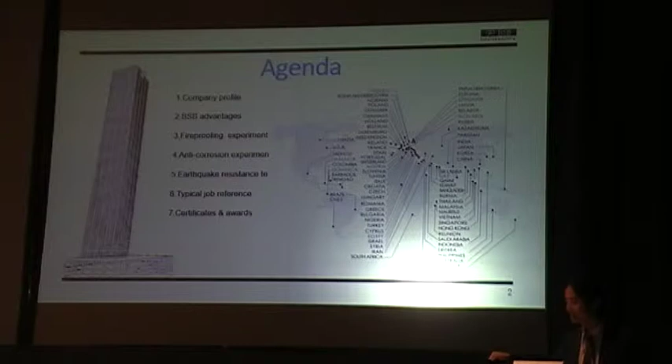These are some of the countries that we exported our air conditioning to. And this is the headquarters that we have for BSB, that we built in, I believe, 2009, as it says.

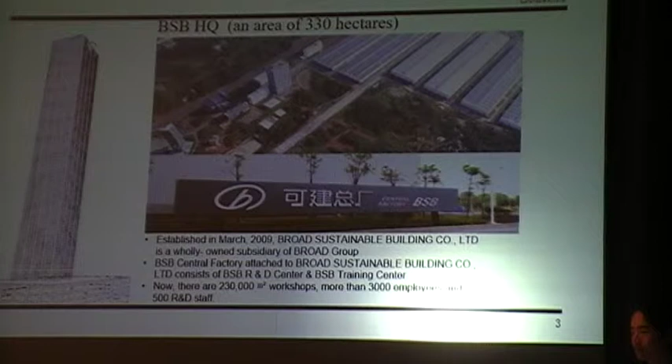And earlier, I think the building that we have seen, the 30-story building, is existing. It's a hotel. And I don't know if Mr. Yazani had the opportunity of staying there. I just slept there. You slept there, okay, wonderful. So it's real.

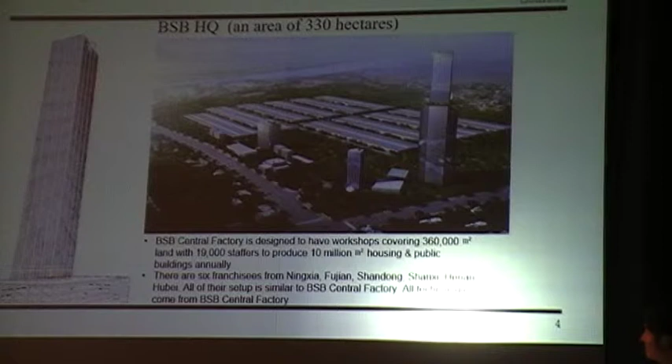Earlier, there was Mr. Santiago from Kriba. Yes, Mr. Santiago sent these videos to his entire company. He told me the story and asked if it is real. Indeed, it is real.

And even the first Sky City project, there were many hurdles we had to overcome. It was supposed to be completed this year, but I think we're going to try again next year with our newer system.

So this is how, as you see, our building floor plates are created. Each floor plate is just the maximum size that's allowable to be transferred on the highway. And this system, and these photos you're looking at, are already outdated. Currently we're developing an even newer system, which I will explain later.

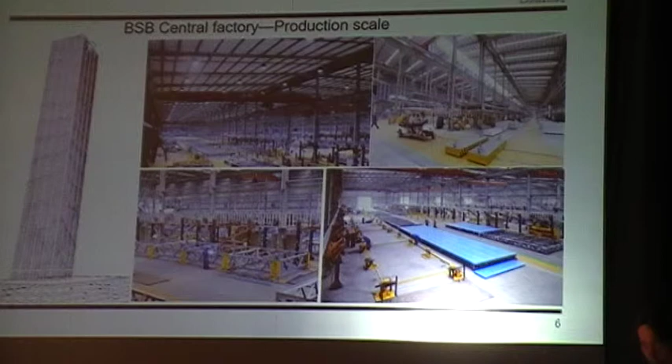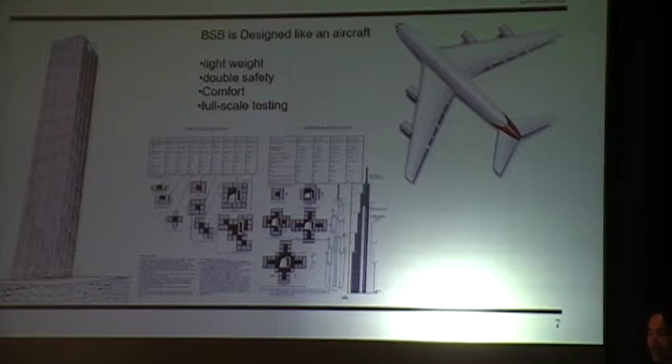So, as I said, it's like how we're building 747s or how we're building iPhones. So people ask, maybe modular architecture has very little variety. And we always have to explain why we're doing what we're doing. It's like saying, if you have a perfect phone or perfect plane, let's say a perfect building, why would you need it to look different? So these are some of the variances of how the modules can really assemble.

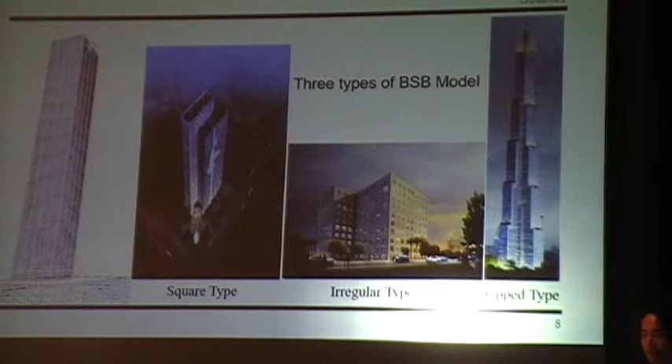Then again, in the past so many years, we are trying to understand exactly what kind of impact this system would have once it's realized. Perhaps only in China, in this kind of large, fast-booming market, is it possible that we could invest over 500 engineers and billions of dollars into this research and development process.

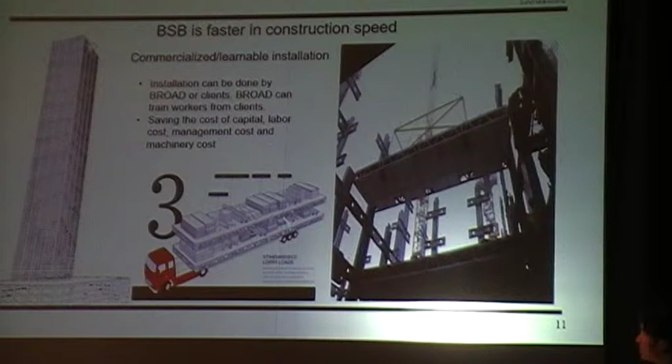Below, I'm quite happy with this illustration, which also sadly is going to be out of date next year, because the whole system is going to be very different. All the floor panels will actually package into a shipping container, so it will be more plausible for a global market. And this was a cutout from Wired magazine when they did a story on us a few years ago.

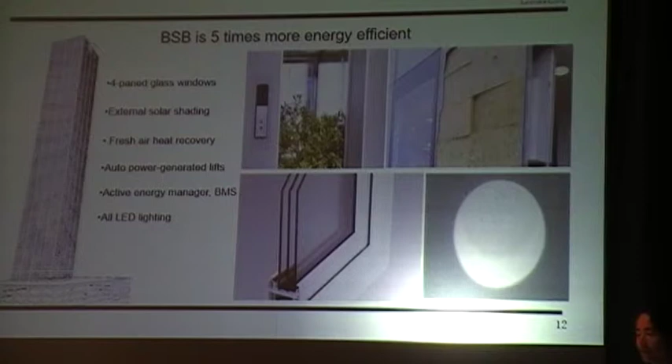LEED, as I have learned in the past hour or so, everybody's talking about LEED certification. In China, we also have LEED certification, but how come we're not doing LEED certification? It is not that we don't want to do it, but we're going about a different approach to sustainable construction in our company. We believe it is going to be perhaps a way of construction to replace all future ways of construction. LEED certification is still applicable after a building is created, and I think we will have in the future many LEED certified buildings with this way of creating towers.

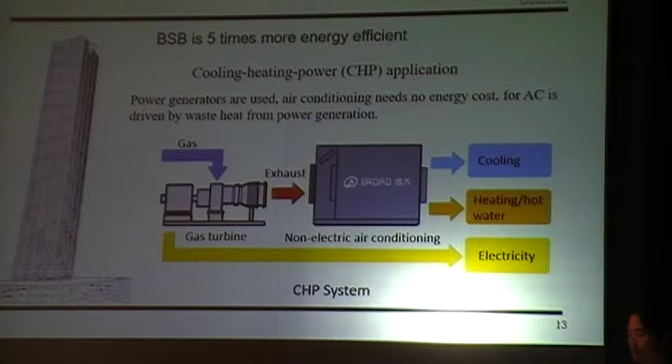This is how Broad started its business 28 years ago, by making these kinds of combined heat and power systems. At first, I don't think we were doing the gas turbine units. It's only the non-electric air conditioning that takes in any sort of energy or heat. And in this rendering, the CHP is using exhaust from power generation. So I'll pick whatever is easy to digest at this moment.

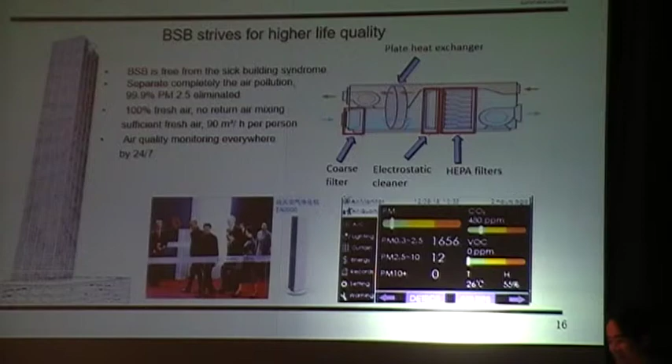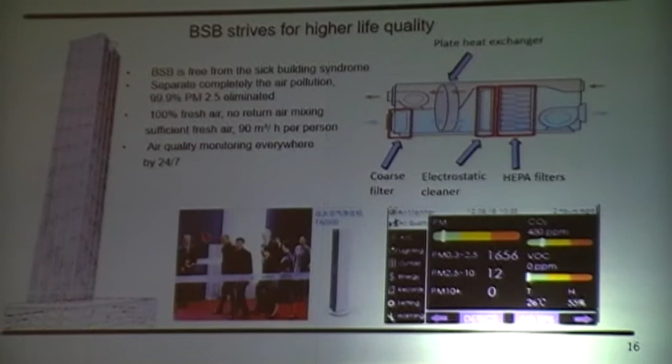In terms of air quality, which is a huge problem in Beijing for those who have visited, in the APEC meeting this year, Obama and Xi Jinping walked by one of our air purification products. It's kind of funny to see this advertisement here. Broad also makes fresh air units. That's the Broad Air Company. So the Broad Group has really created an ecosystem that is ripe for the development of such a sustainable construction package.

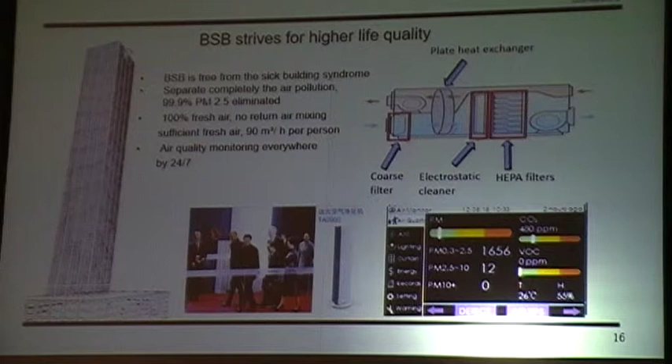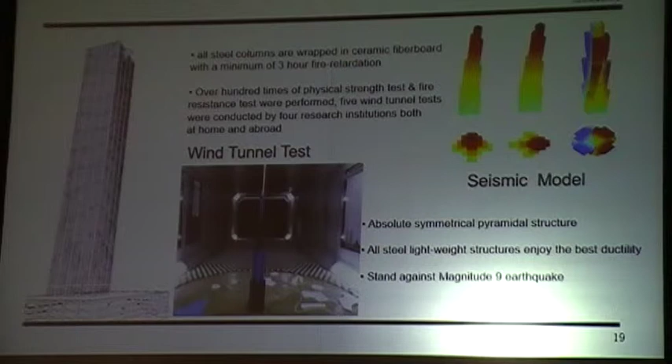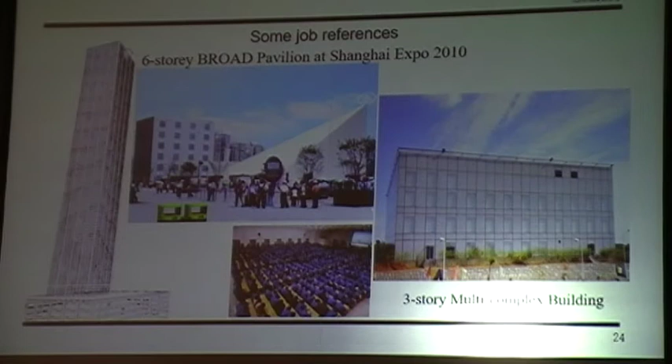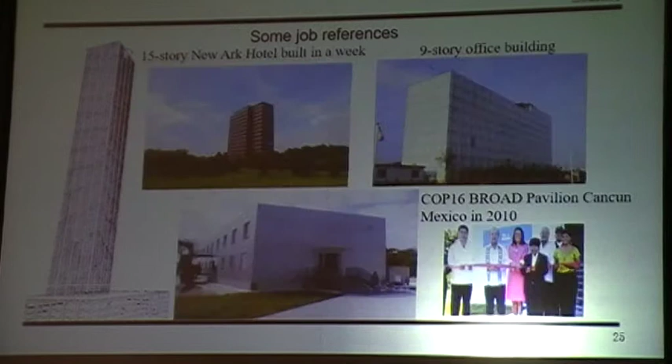So here, we have done close to full-size earthquake simulations in China. And these are some more towers that we have created. Oh yeah, these are also using this technology, but creating different towers.

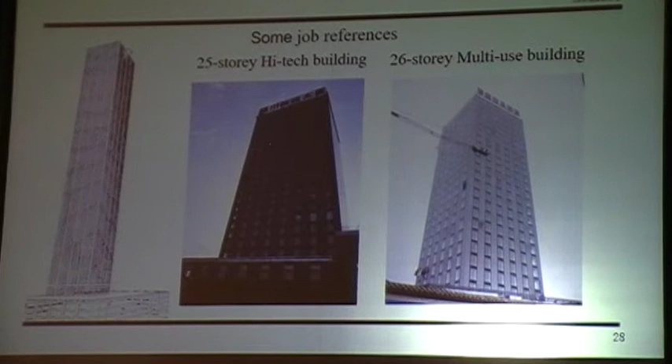As you can see, the facades and everything can all be quite interchangeable. And this is our latest, tallest tower at the moment, 57 stories. It is quite unique because if you look at this picture, it is a sky courtyard, we call it. And from the bottom floor to the top, there are 19 of them. So these courtyards are about 600 square meters and 3 floors tall.

It's not as big as this room, but can you imagine courtyards all the way to the top and interconnected by these paths, almost like a parking lot ramp. So you can cycle, and we have actually done a cycling championship from the ground floor to the top, partnering up with a famous bicycle brand.

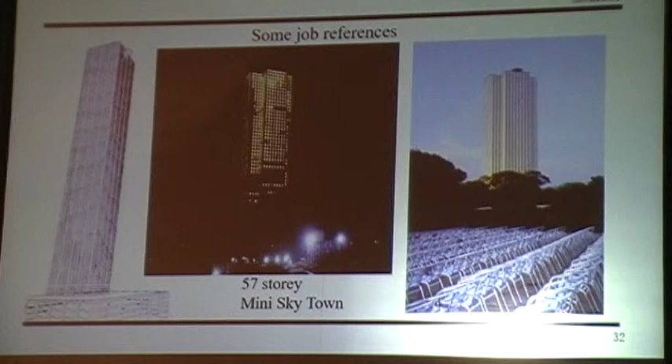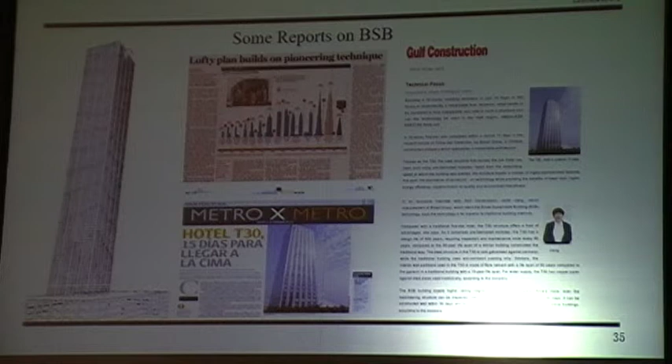So all this seems very, very strange, and even myself as an architect, I can't quite understand why we're doing such crazy things, why my father's doing such crazy things. But I understand that we're always trying to push the limit, and at some point, oh, that's him. We do have a lot of similarities. If our tallest building is really realized, I believe that it will create a much larger impact than what it has right now. So there are several international reports on what we are doing.

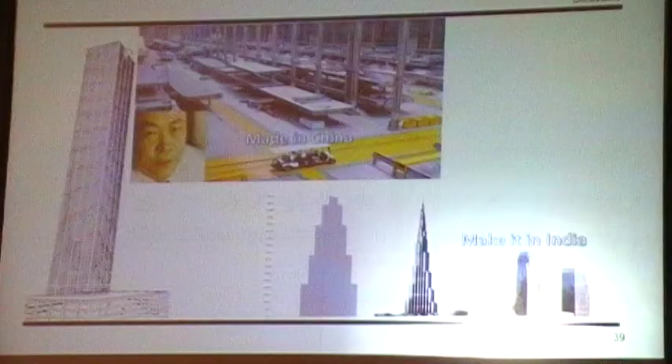Okay, so coming to 2011, which is the background of this tower, the second question people ask is, why are you building so tall? The reason we want to build so tall is, today I was coming from the airport to the city and I saw the traffic jam, and earlier coming from the Sheraton to this venue, this traffic jam again. So to build tall and to build at large scale, we're hoping to think of sustainable building on a higher level.

So can a building become a city? And the city has to share the burden of transportation. We have done some feasibility studies and calculations: for such a building, a sky city, how many cars could it save? And for a city official, or a government building a city, can they think more holistically, even considering road investments.

If today we think that sustainable buildings are more expensive and always have to add a premium, we have to move to the paradigm that sustainable buildings, such as a city-level sustainable building, have to be even cheaper, a lot cheaper. And so far, our buildings have tried to compete with conventional construction methods. So we're hoping with this kind of rigor in approaching a building system that we can create lower and lower cost buildings each time.

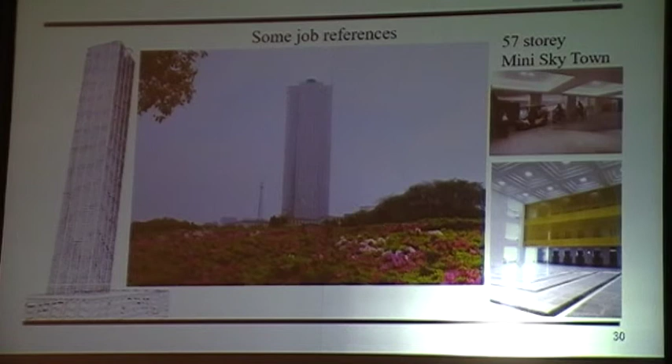And with this challenge, it is something to behold once our latest product model comes out, the one I explained, that packages the floor plates entirely into a shipping container, and then we can be more at ease to develop demo products around the world. And I hope with my trip to Argentina this time to speak to some of the construction companies, developers and architects in this audience, so that we can look into co-developing a project using the BSB system, and really bring sustainable construction to another level with maybe a Chinese mentality of innovation within it.

So to explain why my father is approaching sustainable construction in this way: it is because he is really looking at climate mitigation from the start. Earlier, all the speakers have presented that buildings consume a significant amount of resources and emit close to 50% of the CO2 emissions in the world. So if the building sector is really to contribute to climate mitigation, we have to create a more drastic approach. And there's a Chinese saying, we say it's just simply brutal, and it's simply easy to understand what we're doing.